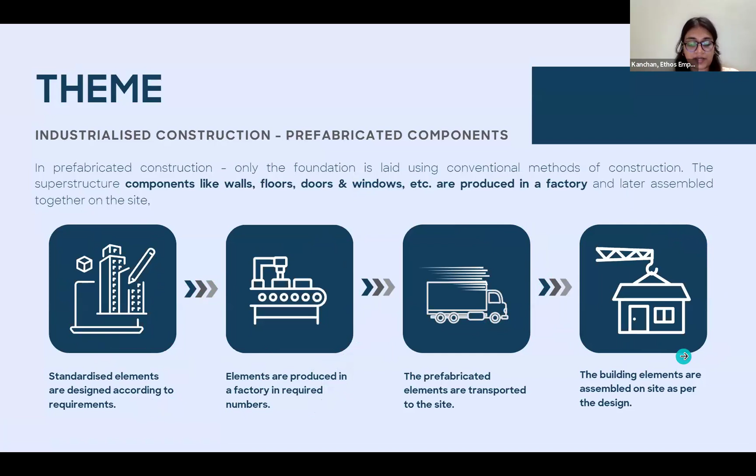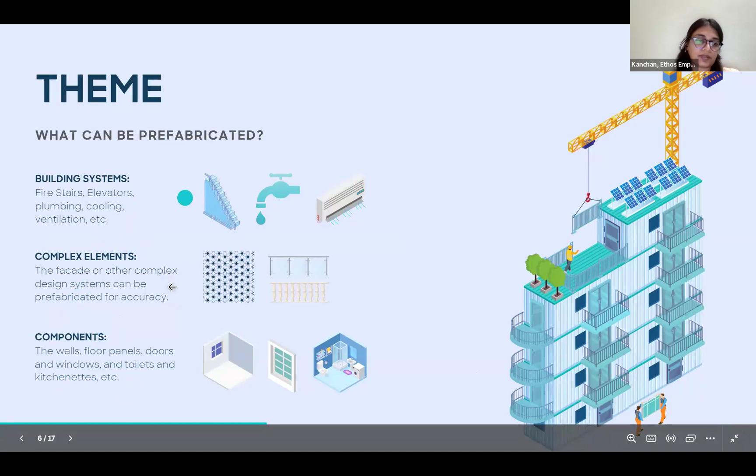So the process starts with making the standardized elements according to the requirements. Then the elements will be produced in a factory. Then the prefabricated components will be transported to the site, and the building elements will be assembled on site as per the design. What can be prefabricated? Building systems, complex elements in a building, and basic components like walls, floor panels, windows, kitchenettes, toilets, etc. They all can be prefabricated.

Here is our first case study. It's called 10 Degrees and it's located in London, United Kingdom. What you see here on the facade is a blown-up picture of that, and you can see the repeated origami-like shapes of these facade elements, basically Juliet balconies. On the next page, we see a close-up of how these elements were created and then assembled. This also shows the arrangement of units that could aid the process of prefabrication.

So how did prefabrication positively affect and benefit the construction process here? The construction time of such a tall building was reduced to a 39-month timeline from the concept sketch right to the handover. Then there was a 67% reduction in carbon emissions due to the construction, which is quite a large number. And the quality control was also much better, and the finishes came out much better.

How did they do it? They extensively used techniques like virtual reality and 3D printing to create smaller prototypes, looked at where they could modify something or where it needed upgrades, and then replicated the model into the actual building. And the prefabricated components were manufactured offsite and then assembled or stacked on top of each other at the site.

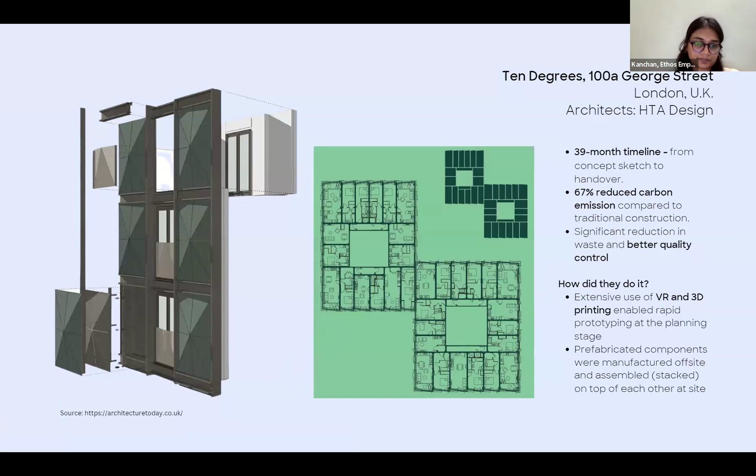Now we come to your design task. So your task would be to design a high-rise residential building or a building complex using industrialized construction with prefabricated building components. How can you do that is by understanding what is IC and what is prefabrication of building components, and how can you use them to create sustainable, accessible spaces, and how much creativity you can show while assembling these prefabricated parts of the building. You also have to explore some suitable construction materials and prefabricated components while designing your project.

So with this method of construction, you will be able to demonstrate a transition from unorganized to organized construction practice, where unorganized construction practice would be the conventional methods of construction. But through industrialized construction, you'll also be able to explore how project management and a well-organized labor force can aid the construction process, right?

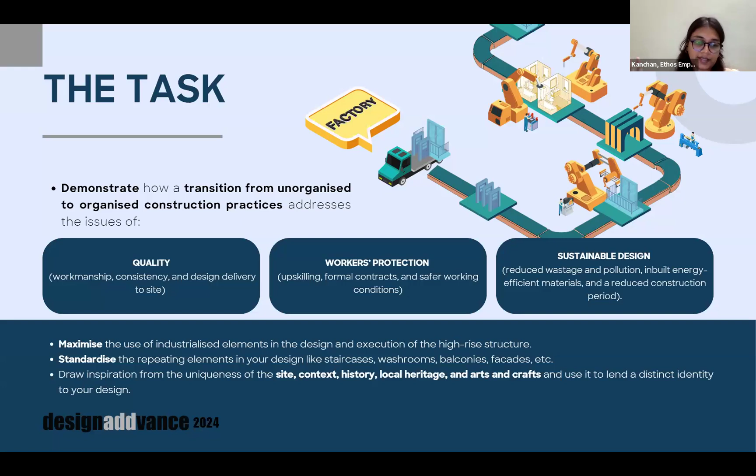Then what you have to do in your project is to maximize the use of industrialized elements by standardizing the repeating elements. Like we saw a few slides before, elements like balconies or railings and doors, windows, even whole bathrooms, wall panels, etc., can all be standardized and produced in a factory, and then it can all be assembled at the site.

Here are the things to consider while you're designing. Integrate the industrialized construction part in your design well. Do an in-depth research into IC and its application. Sustainability is not to be left as something to be added at the end. It should be a part of your design process. Ensure that the spaces are promoting well-being, and be as creative as possible while you are designing with prefabricated components.

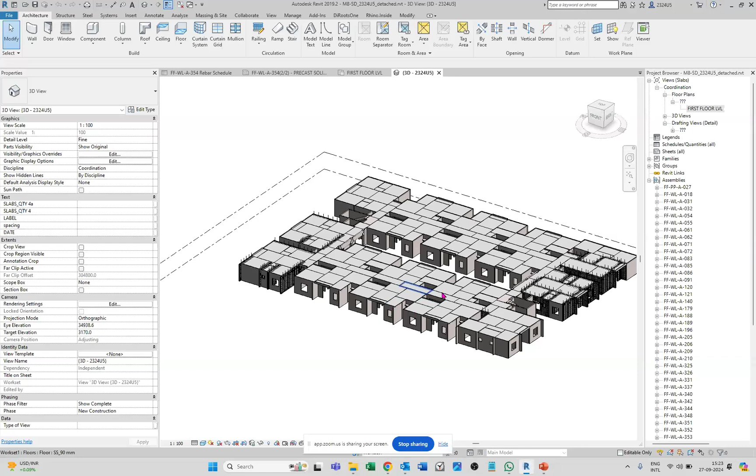So today I'll be taking you through live Revit models and the practical use of it and what we have been doing so far. So I think, like we are working in the field of precast technology and advanced construction technologies. And so a brief about us, basically. And some of the applications, like rightly, the theme is, just a minute, just a minute.

Sorry, everyone. Actually, I'm a bit at site, so there's a lot of disturbance around.

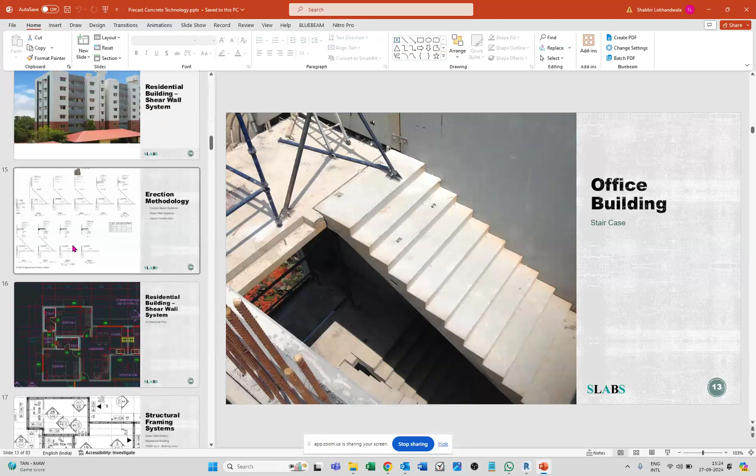Fine. So a brief about us is we have been working in precast technology and advanced construction technologies. Our company is Slabs Engineering Private Limited, and we have been working in precast 3D printed concrete structures, parametric structures, 3D volumetric structures, and so on. So basically, primarily, we have been doing the entire engineering, structural engineering, design, and modeling, and then finally extracting the drawings using Revit tool and software.

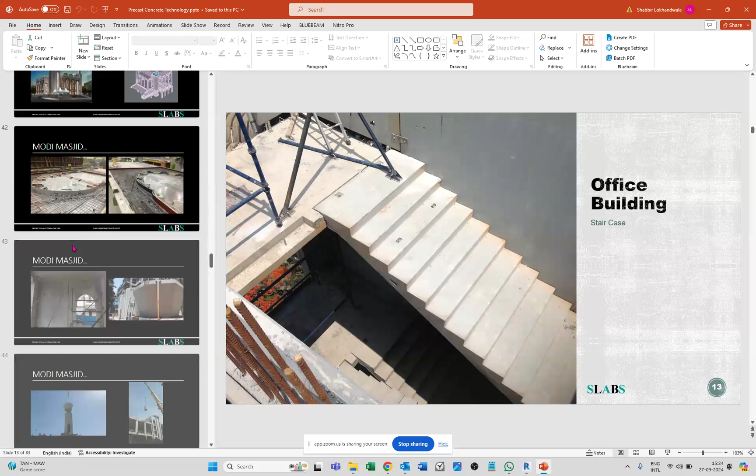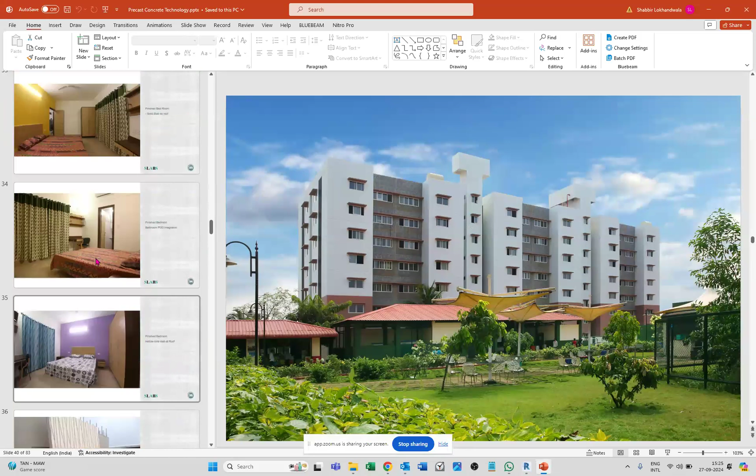So whatever you can see on the screen is, like, this is a mosque project, this is a public building, this is a school project in Kochi in Kerala, and then we have done Yenepoya University. It's a residential project about 1 lakh square feet, which was completed in about 4 months of time frame. So all these projects we have done so far using BIM. Completely. We are entirely a BIM company, and we do all our projects, engineering projects, only using BIM.

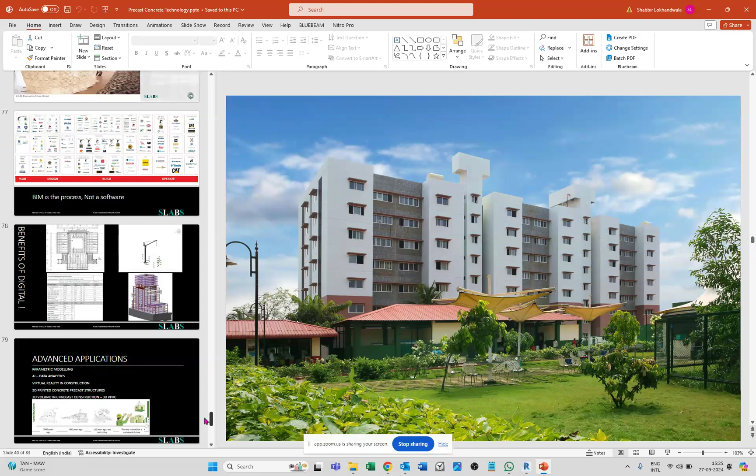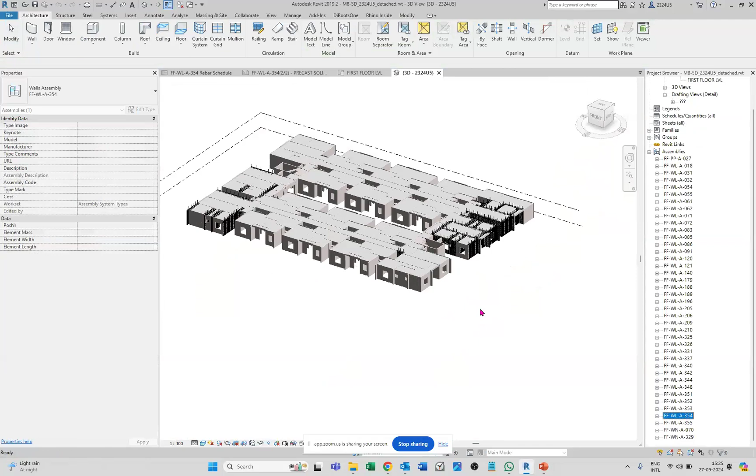So the real-time advantages, you can see there's a modular structure. All the wall panels have been modeled, the slabs have been modeled, and then we extract the real-time data from the Revit software. Okay. When I say that, let me show you up to what extent we use it. So we create a virtual 3D model. It's entirely a high-rise building about 10-story tall. And from this model, we are extracting every fabrication drawing.

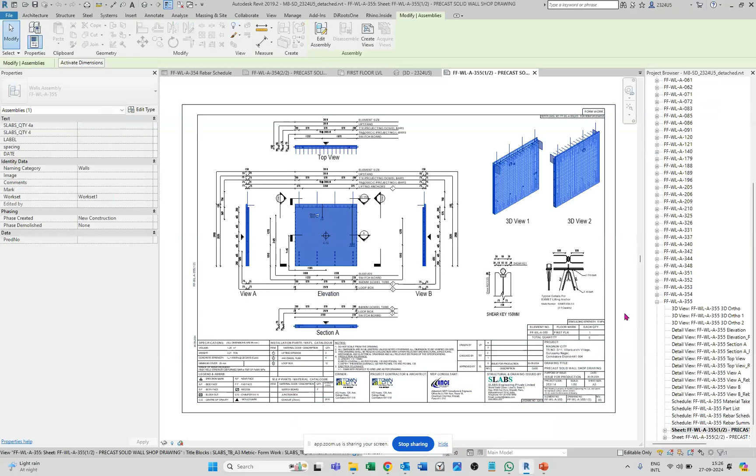So for example, if I click here, right, this is my panel number A355. If I go to panel number A355, you can see the drawing sheet here. And we have generated, this is our formwork drawing, and this is our reinforcement drawing. So we have physically modeled each and every rebar. Okay. And then this is a bill of quantity. You can see the bar bending schedule, which is generated automatically using Revit.

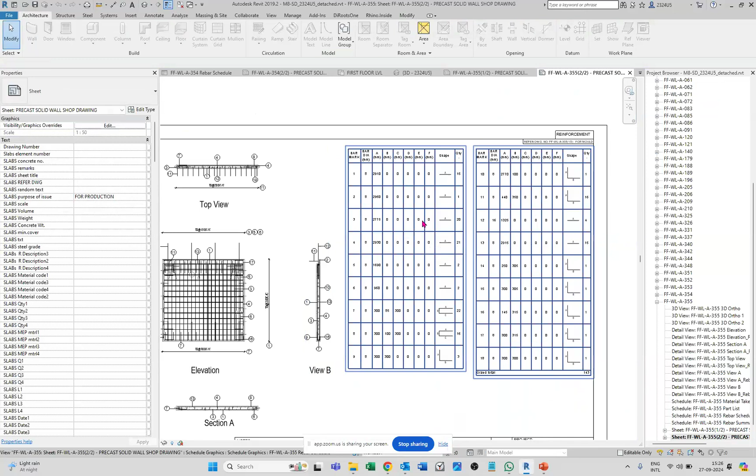Which otherwise a person would do manually in AutoCAD, using some spreadsheet, a combination of AutoCAD and spreadsheet and things like that. So as an engineer who is doing complex, advanced buildings in the construction industry, we require sophisticated tools to support our vision and the kind of projects that we do. So this is one such platform. I mean, there are a tremendous amount of platforms.

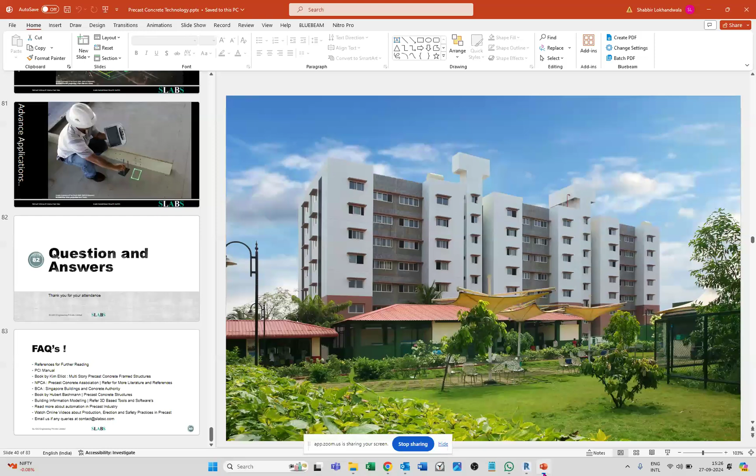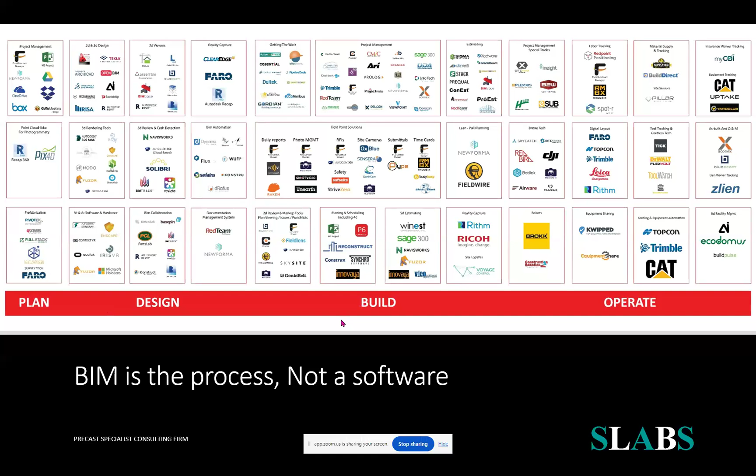BIM is a process and not a software, right? So I tell people usually that, let's say in BIM, these are the kind of softwares available in the market. Okay. So for planning there's a software, for design there's a software, while constructing a building there's a software, while operating the building there's a software. So BIM is a process and not a software. Okay. So Revit is one such tool that we use very rigorously while doing our projects. And quantification or BOQ is just a part of it, right?

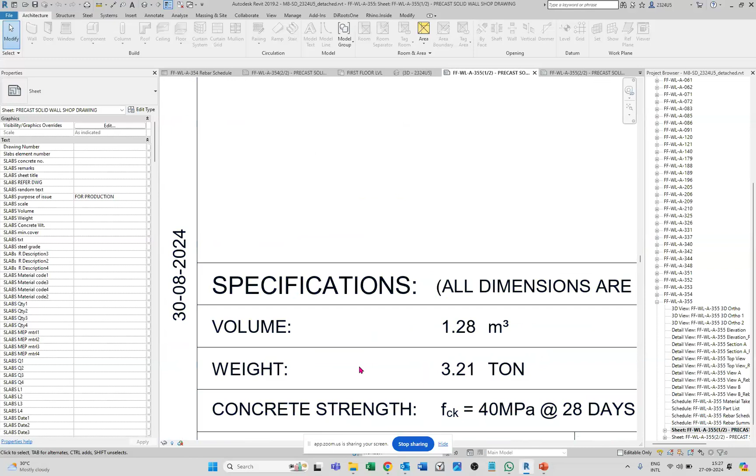So this is the level of BOQ in terms of rebar, bending schedule, etc. Now for every panel, there comes a volume and weight. So we have created some sort of scripts and things like that. The volume and weight of every panel is filled automatically. So there is no human intervention in terms of scheduling, in terms of quantification, etc.

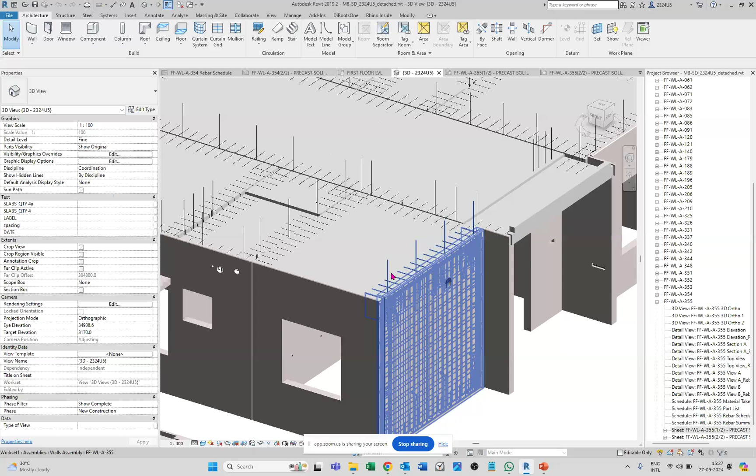For all our projects, when I say it, I mean it, because we are using it day in, day out. So for example, if you see my building, right from the grout to my wall panels, to my slab panels, to my reinforcement, the quantity of the entire building material is taken out automatically.

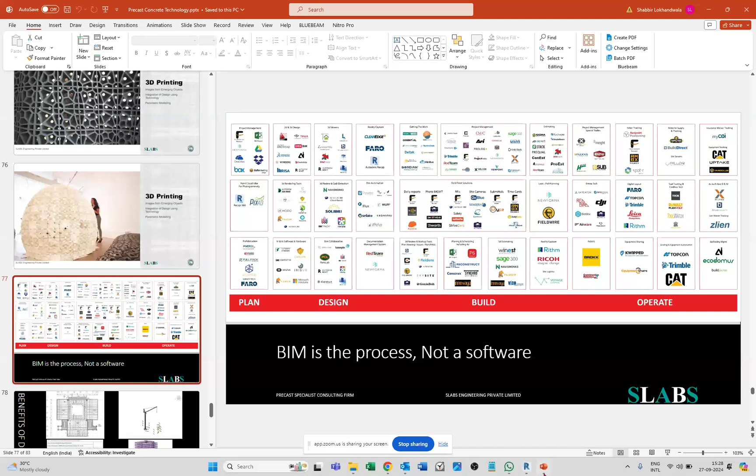Presently, we were doing one of our interiors projects, our own in-house new office project, and what we did is we modeled the entire building, and we calculated the glass facade, the glass partition, the mullions, the doors, the windows, the entire areas, everything required for interiors as well, right? So this is a very beautiful software, and I think this is where actually the value is added.

So this is how typically we get the output. We have created some sort of a template, and then we get, let's say, the number of elements in precast, the total quantity of concrete, the total quantity of steel. So we get it for the entire project. So we understand the entire civil quantity of the entire project, right? Being an engineering firm, that is what we need.

Then when you see the entire 3D model, definitely it gives you much more clarity, enhanced clarity and vision as to how your building will be constructed, erected at the site, and reduces a lot of human intervention in terms of imagination, etc. Also, the BIM model gives you a lot of indirect advantages, like you can check the number of elements, you can check the tonnage of elements, if it can really be lifted by the crane, and so on and so forth.

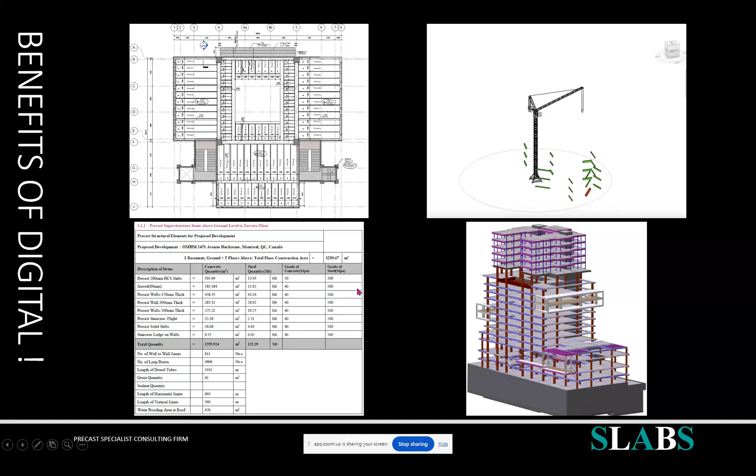And then we also take out the entire drawings using the Revit software. So these are some of the indirect or direct advantages that we take out of the software, right? So that's where we stand. So that was just a quick brief from my end about advanced quantification and the tool that we are using to extract the information from the software.

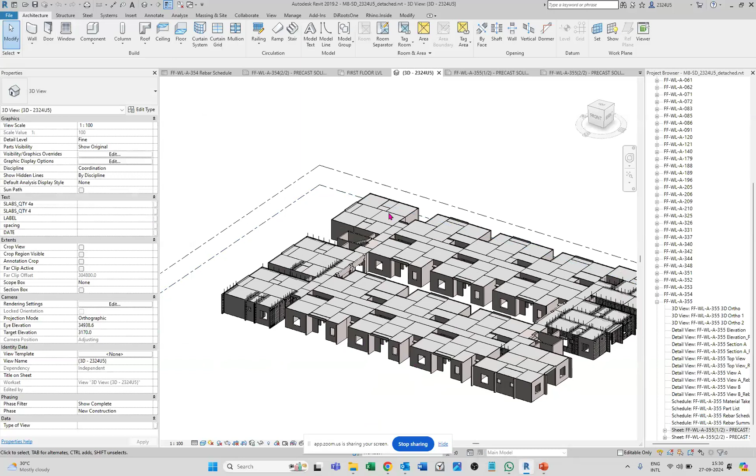Let me show you another example so that you get much more clarity as to how you can use this tool and software, and to what extent. So this example I'm showing you right now is a precast building. It's not like a conventional building. So in a precast building, you have to literally model each and every joint. This is one panel, this is the second panel. So if I go to the top view, you'll see each and every joint. So every panel is physically modeled in the software.

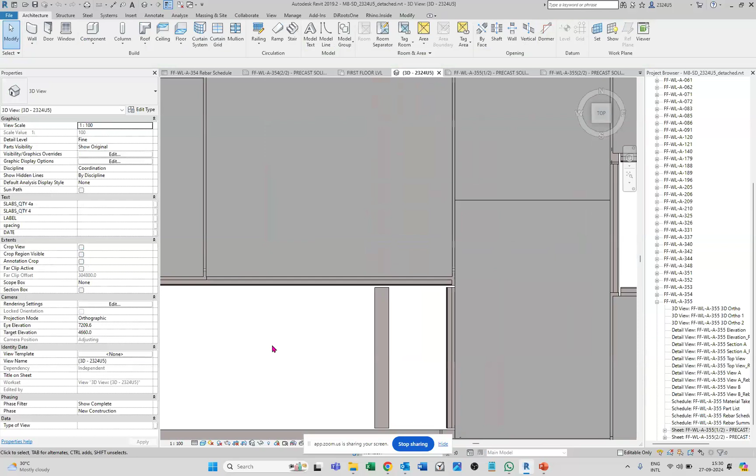Definitely a lot of SOPs, standard operating procedures, and a lot of inputs have gone in for us to arrive at this level, the kind of work that we're doing. But definitely this is the kind of competency we have developed for using BIM at a very advanced level in these last 10 years. So this is one such sophisticated project in precast technology where I wanted to showcase the kind of detailing that we do, the kind of quantification, and the advantages and benefits you can take out of the software.

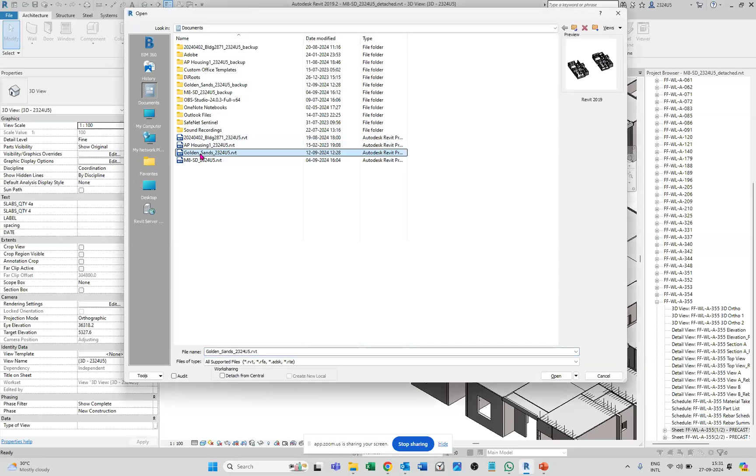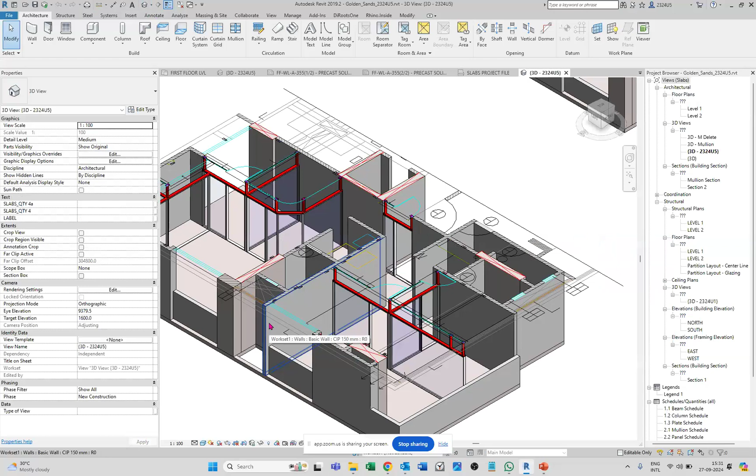Now this is one such interiors project wherein we have modeled the entire MEP. So in this project also, in a precast building, we have modeled the complete MEP: mechanical, electrical, plumbing. So if you see here, you can see the glass partition. We have modeled the glass partition. We have modeled the steel work.

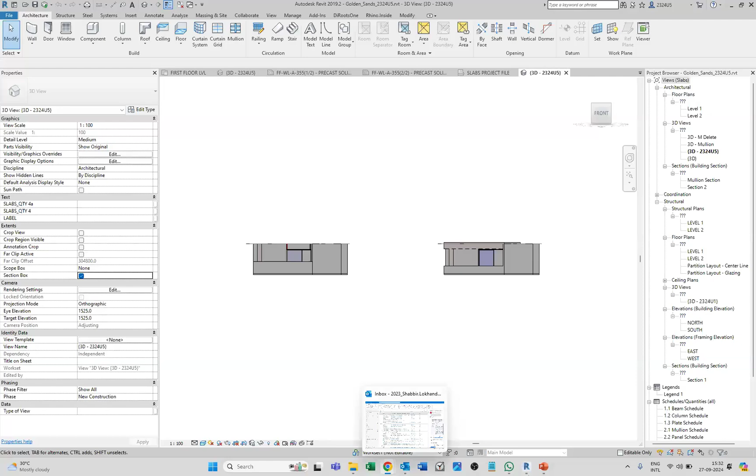We are even doing some of the projects in 3D printed concrete structures. That also we are doing completely using BIM.

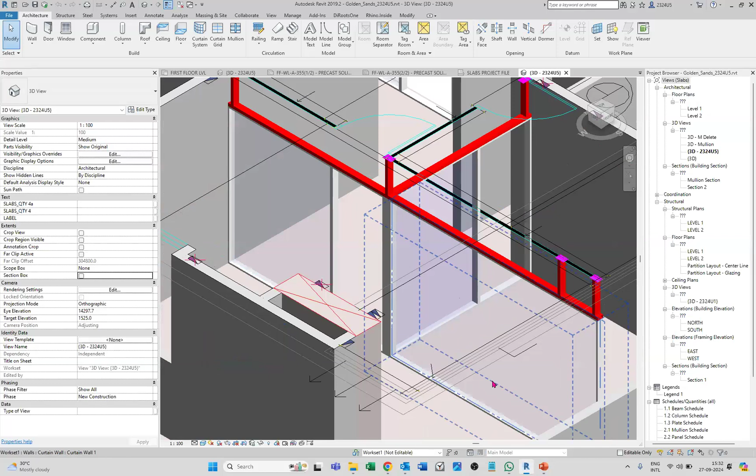Because I think that's it. I wanted to show from my end in regards to these projects. So here you can see that we have modeled a glass partition. We have modeled the mullions that are used for the glass partition. It has steel which is used for supporting the glass partition.

Then we have also modeled MEP, the conduits, the junction boxes, etc. The brickwork is modeled, RCC columns and beams are modeled. So it makes your life very easy, and then you get automatic BOQs from the software, which allows you to understand the exact estimates of the project in terms of the labor cost, in terms of the material cost, in terms of procurement.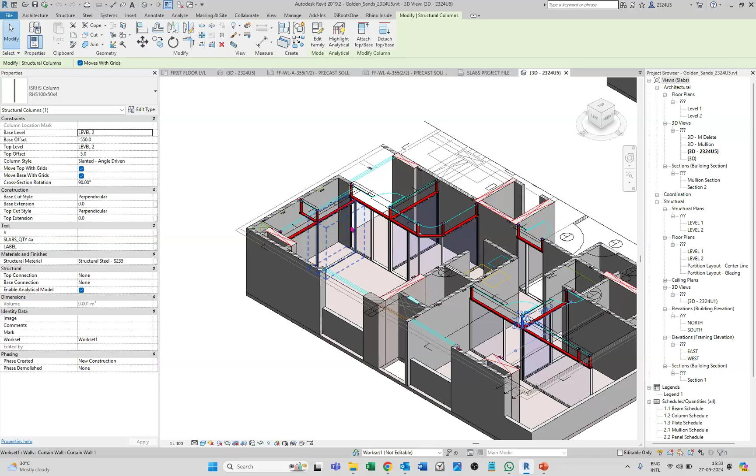So the overall costing, what you allow for the project, is exact. You're very, very close to the exactness of the quantification, etc. Right. So this is another project that I wanted to show to you. Let me check if I have one more to show to you.

So over the period of time, we have done a lot of projects. Last year we completed Kuwait International Airport, one of the largest airports being constructed in the world right now. Around $8 billion is the cost of the project, and the complete facade engineering was done by us in precast. So that's where we have explored. We have done parametric modeling for that particular building, and then we have also done GFRC design on BIM.

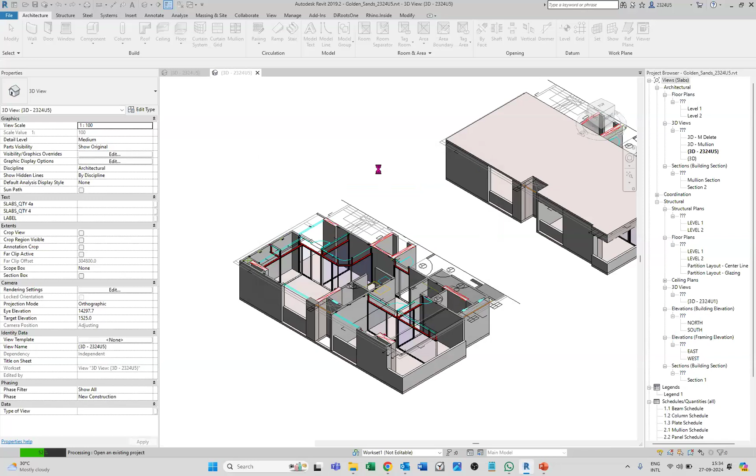A lot of facade engineering projects also we have done in precast using BIM. Dome-shaped projects also we have done, where domes are cast in precast. So all such vague shapes also we have modeled in precast.

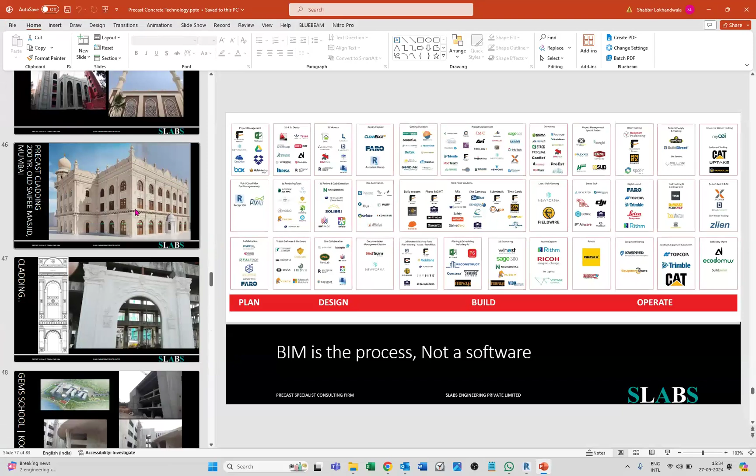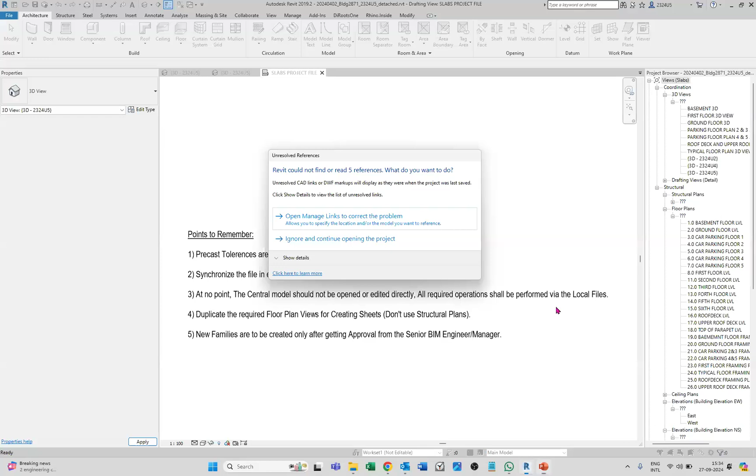This project I'm showing you here has a lot of architectural ornamental features. If you see this project, all these features also we have modeled in BIM to understand the quantity of the ornamental features, which have GFRC and at the back end precast, etc. Right, so this also we have done in precast. Right.

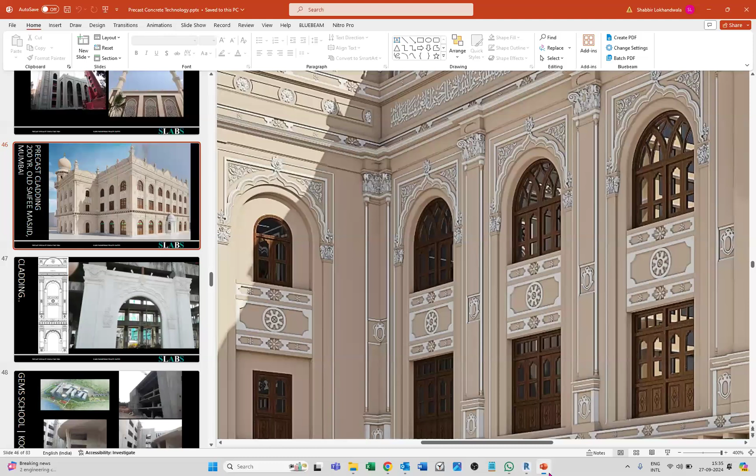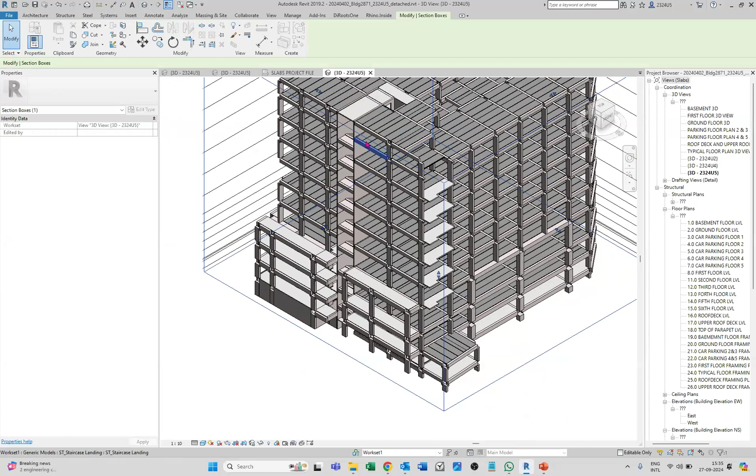Okay, so this is another project I want to show to you. Okay. This is a project in Bahrain, a multi-story building with a car park and so on, completely in precast. So it comprises precast columns, precast beams, precast hollow core slabs. So complete modeling is done, and then the entire BOQ, bill of quantity, etc. is extracted. If you see the schedules, you can extract it directly.

Right click if I want to find out, you just click on material takeoff. If you just click on columns, click OK. So if I just click count, if I click on family type, material, area, volume. Okay. The volume. If I then also click on the level or something, yeah. Mark numbers also I can get if I click on levels. Okay. Click OK.

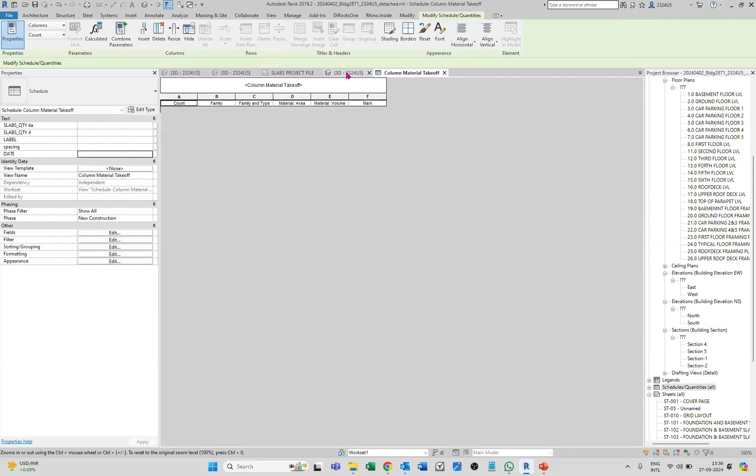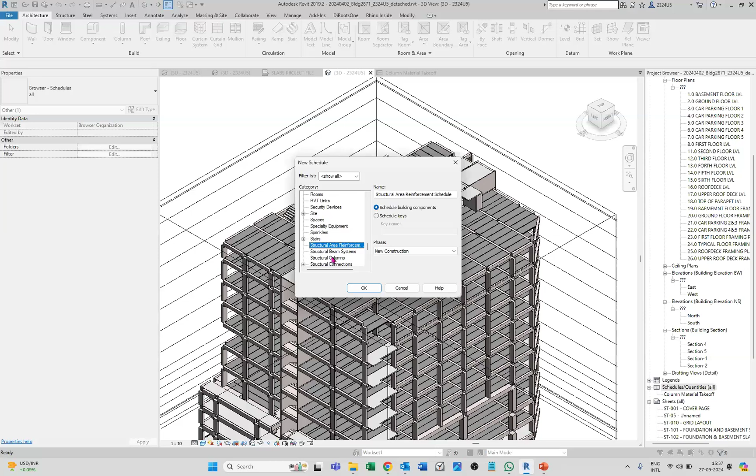So I just click here. I think it's structural. Okay, so structural columns. Okay, material takeoff. Structural. Click on structural columns. You can see the entire BOQ that we get extracted from here.

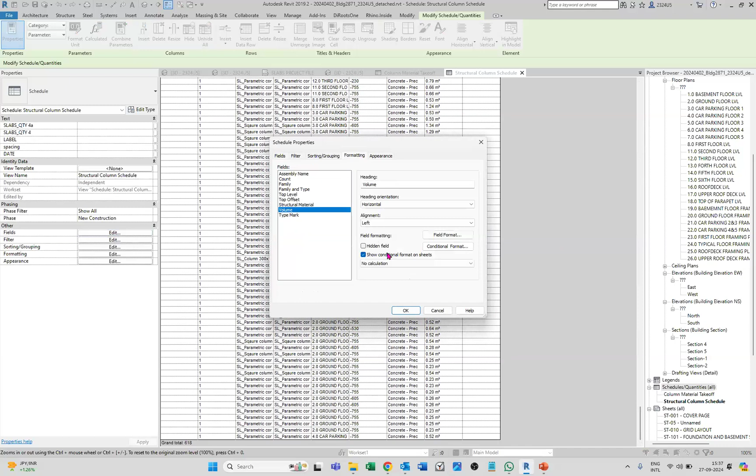And if I want the total quantity, let's say if I just click here, grand total, okay. So I'll get the total quantity, my summation: the total number of columns is 618. If I want total volume, I'll just click show totals. Okay. So total column volume is around 431 cubic meters. All right. So within a click of a button, you get the entire BOQ.

You get the count, you get the size, you get on which floor it is, you get the level. So let's say this column is located on floor number 5. So yeah, 5.0 car parking number for floor 3. So with exactness of the details, you get the total. And for example, even if the concrete grade is varying with the level of floors, you can see it.

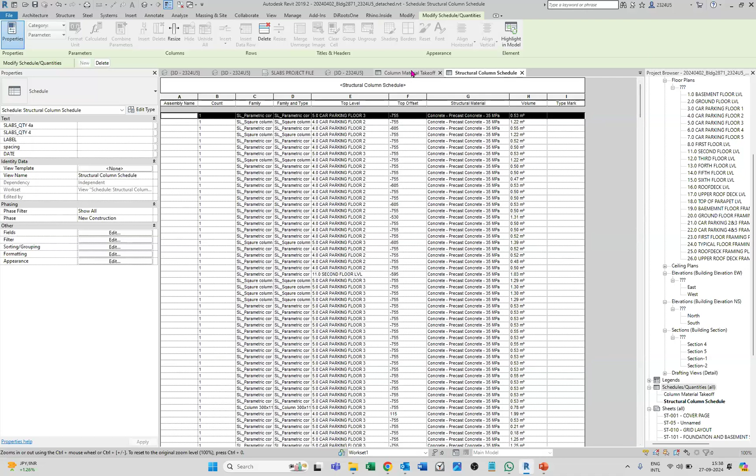So this is a great advantage of getting the BOQ automatically if you use a BIM platform. Within just a few clicks here and there, you can get whatever BOQs you want, right? Okay, guys, today's intent was to showcase some of the live projects. And if you have any questions, any queries, I would be happy to answer.

Hello. Yes, sir. Actually, we have some questions in Q&A, if you can answer that. Sure. Yeah. Sorry, I was running a bit short of time today. So are we having a Q&A session now, or do we have a few other speakers as well?